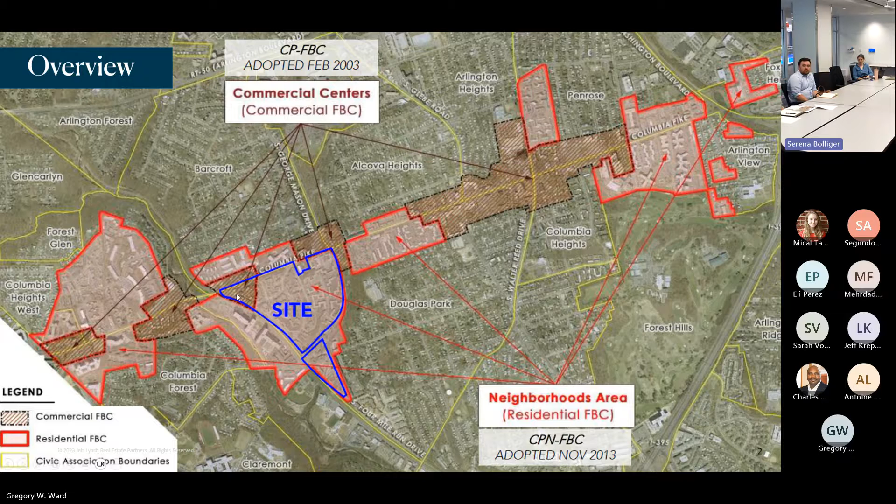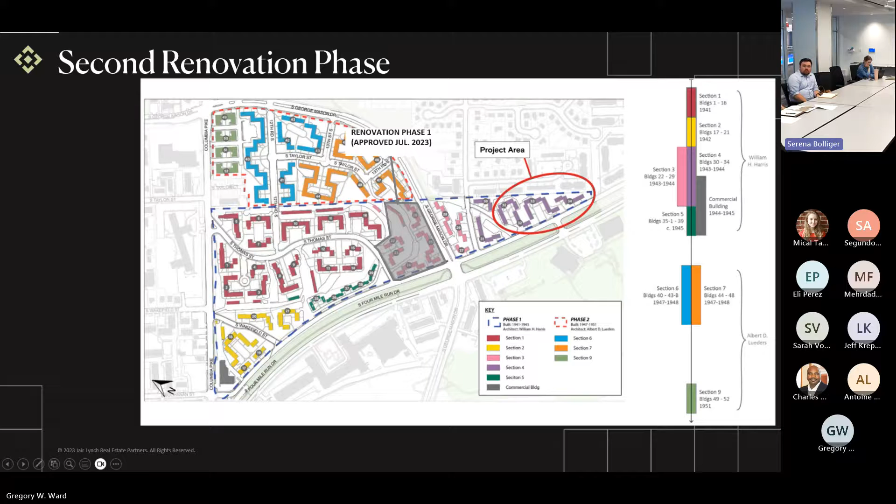Go to the next slide. Here's the aerial image of where this renovation phase is within the whole project. It's that tail end of the form-based code where no redevelopment is anticipated, so this was a great opportunity to go ahead and get started on renovating these units for the existing residents - buildings 32, 33, and 34.

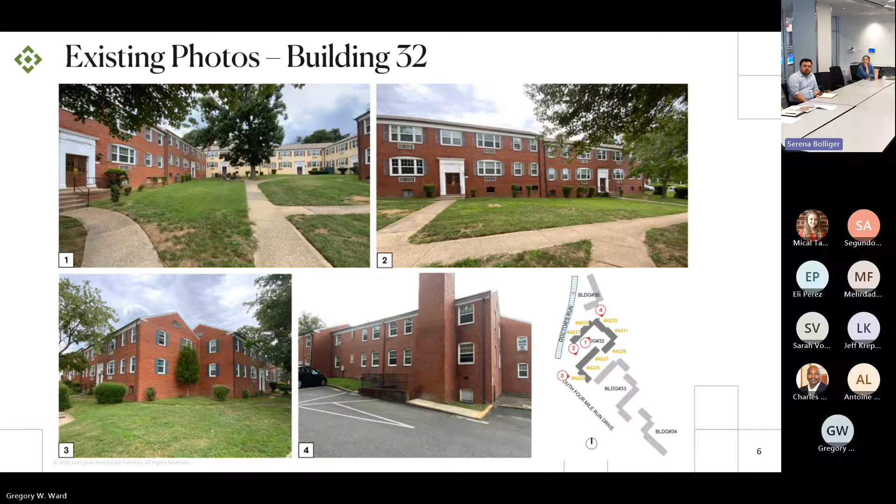Now we'll get into the renovation scope of this project, which is very similar to the project we just went through. I'll note there are no rear additions because of where this is located in a resource protection area floodplain, so there's no opportunity to add additions to the backs of the buildings to make those units bigger. But there was an opportunity to add accessibility because of the way the grade is across building 33. The key differences between phase 1 and phase 2 are no rear additions and adding some accessible entries.

In terms of the exterior renovation, it's very similar: cleaning up the brick, infilling some of those older PTAC heating and air vent systems on the front and filling them with new brick. You'll see some of these buildings where the brick has already been painted - in cases where we're infilling brick, we'll paint it to match the existing painted brick so it blends in.

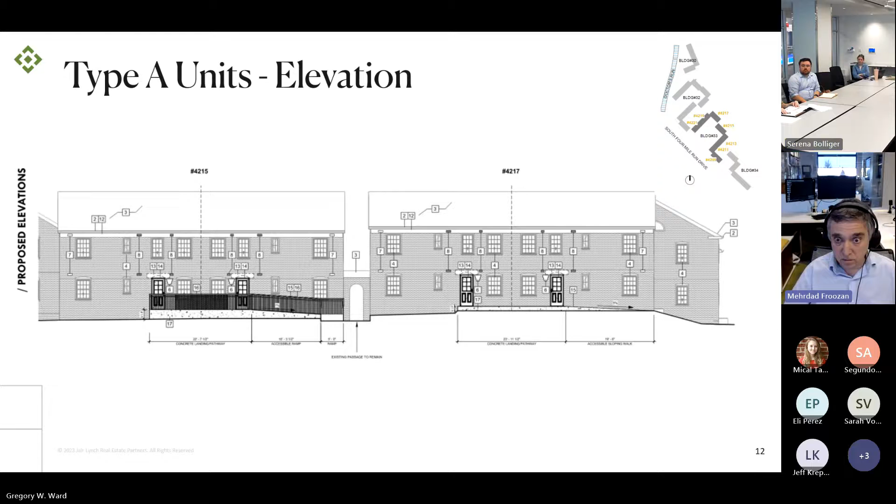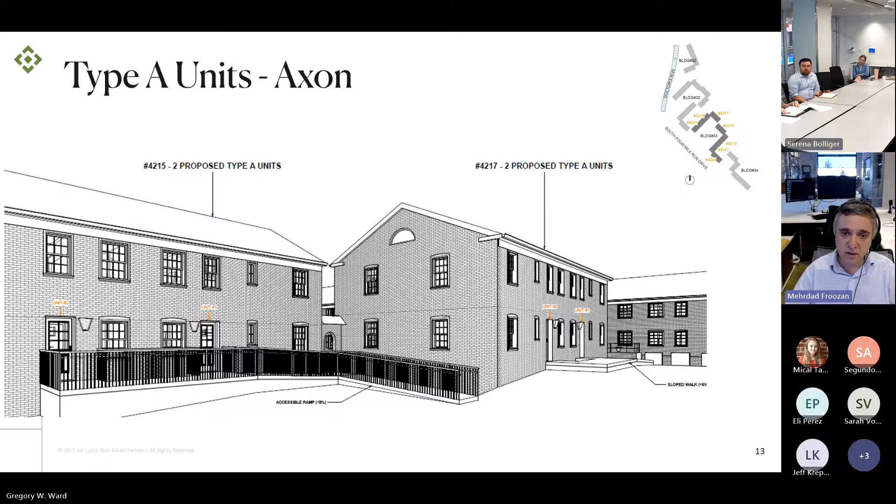Next slide. What we can say on this slide is we're showing the new light fixtures, very similar to the existing for all three buildings in the scope. Building 32 has 14 of these lights, building 33 has 9, and building 34 has 5 of these lights - the same type of exterior lighting. And then also we have the cladding on the left side - we are showing the cladding on the existing trims around the door and elsewhere.

Next slide. Same as phase 1, the 5 buildings 22 to 26, we are replacing the windows with vinyl windows. These are like simulated divided lights, 6 over 6, and then also we are changing the basement windows in kind. So the vinyl windows match the existing style and also the color, but they are much more performant in terms of U value and SHGC.

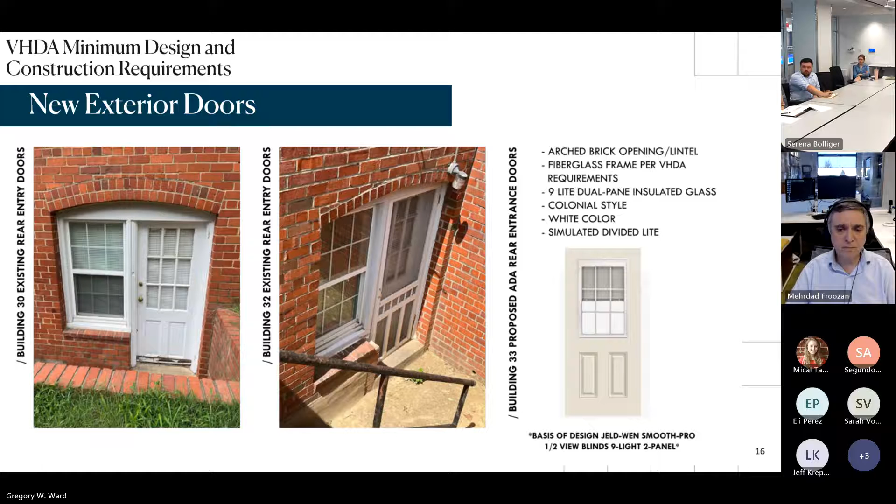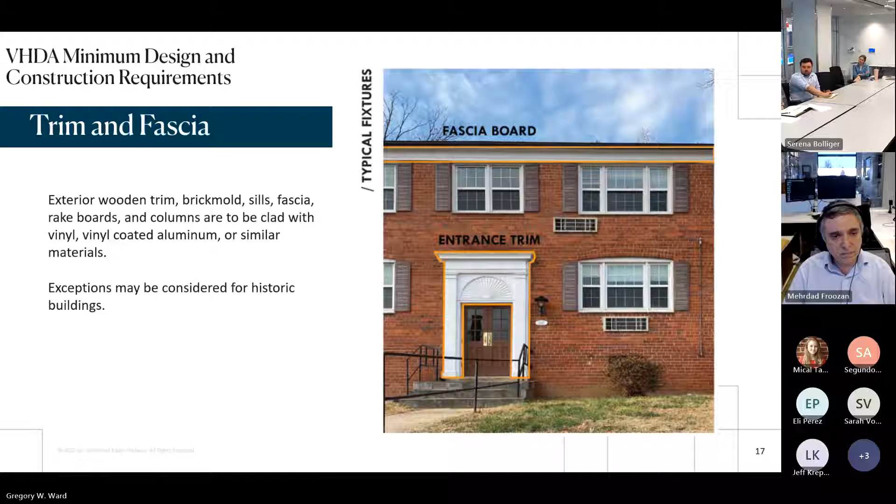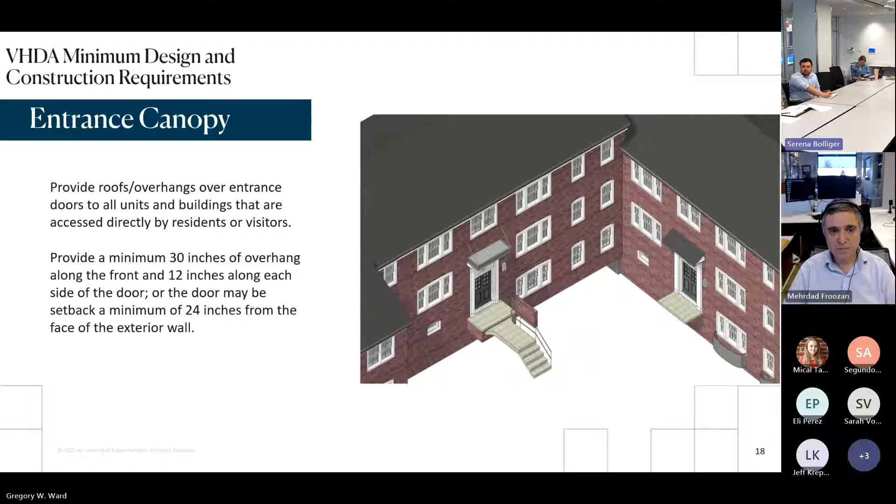This is the modern style, option 1, and this is the second option, option 2, which is more traditional. This is the one we are going to use definitely. The number of canopies is indicated on the left side at the bottom of the page. Building 32 will get 8 canopies, building 33 will get 7 canopies, and the last building 34 will have 4 canopies of this option 2 style.

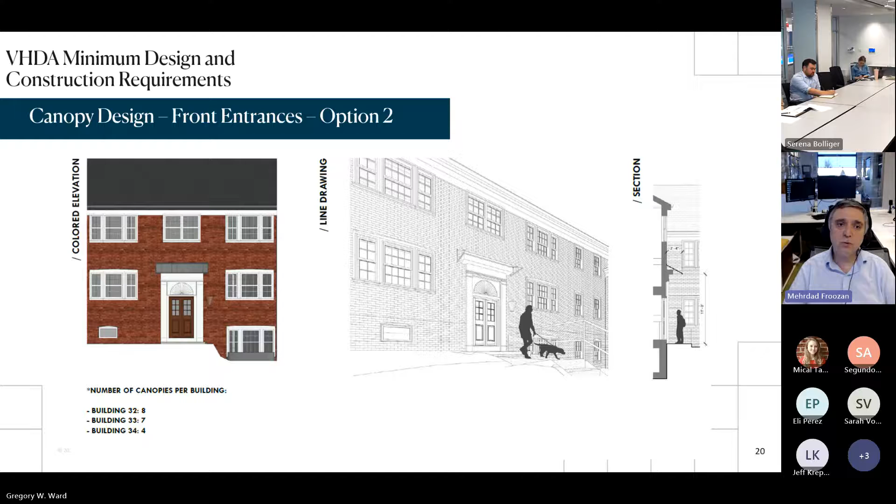For the back side, we also have back entrances that will have canopies. Building 32 will get 6 canopies. Again, the number of canopies is marked here, but with the same style of option 2.

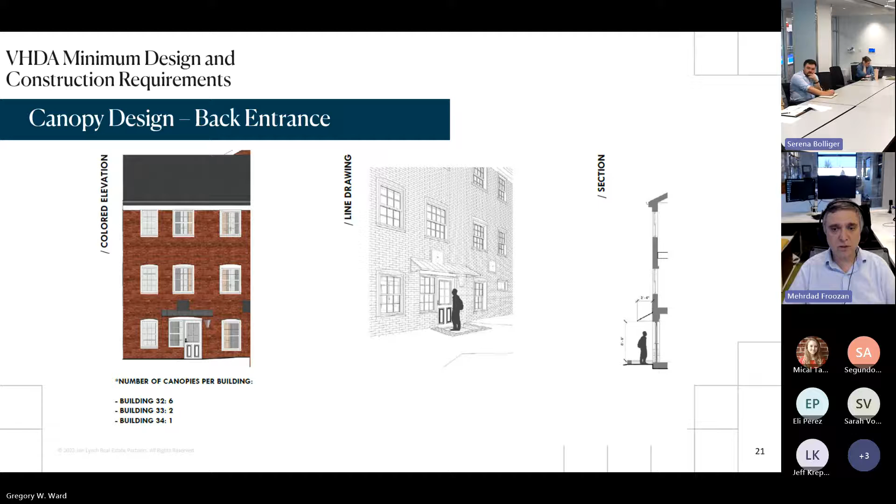Thanks for that. Just to summarize our application materials: we submitted the form-based code use permit last week, and that's now being routed to staff for review. We've got that use permit for our building renovations and site improvements with modifications, similar to last time, requesting a modification for the parking to permit the existing ratio to remain minus those three spaces that were removed to create the ADA accessible spaces. Then we've got 2 tiers of conservation area standard modifications - ones for window replacements to vinyl material, new rear penetrations for ventilation and heating/air systems, and new rear penetrations for the accessible unit entrances and that fiberglass door material. The second set of conservation area standard modifications are ones we'll be requesting waivers for from Virginia Housing, which is the vinyl aluminum cladding, the wood trim, and the canopies.

In terms of timing, this is our first meeting with you all here. We're anticipating going to the HALRB at the next meeting this month on the 20th, and then again going to the HALRB at the October meeting. We're anticipating going to Planning Commission and County Board on this use permit later this year in December. So that concludes our presentation - we're happy to get to discussion and answer some questions.

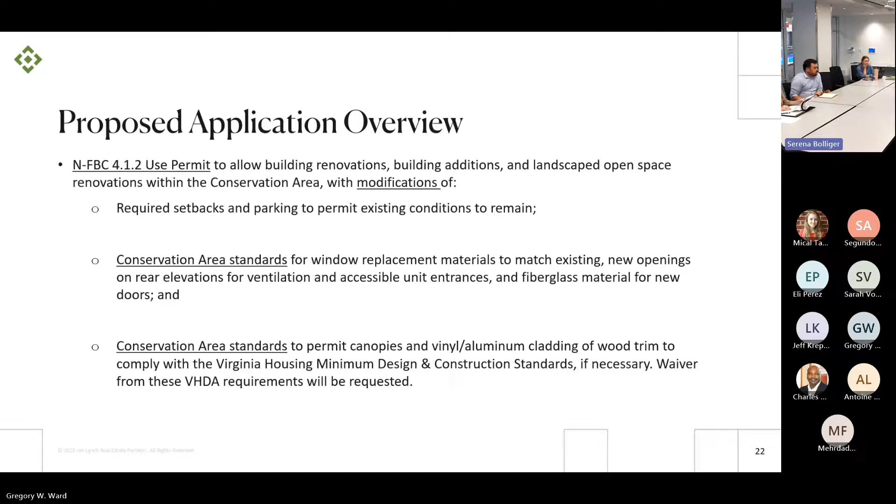Could we go back to the slide with the accessible entrances at the rear? The elevation? Yes. There you go. There you go.

The problem I see is this seems to be grossly overkill in terms of the handrail. You don't have that much of a grade or drop, and I don't think you need a series of vertical pieces there. You could solve that with a couple of light horizontal or near horizontal pieces and have a handrail that doesn't present such a strong handrail in front of it. That handrail could be handled a lot better, I think.

Well, my answer is that at this time we really didn't design the railings, so definitely you're right. We can make this much lighter and better for this purpose. Mehrdad and Jeff, are there any building code or accessible regulations that require a railing every certain distance, or how much room do you have to work around?

Well, normally a sphere of 4 inches should not be able to pass through the pickets. I should say that we still don't have a very precise survey here, and probably the difference of elevation is so small that probably we don't need this much pickets and railings. But Jeff, I think you can better speak about this.

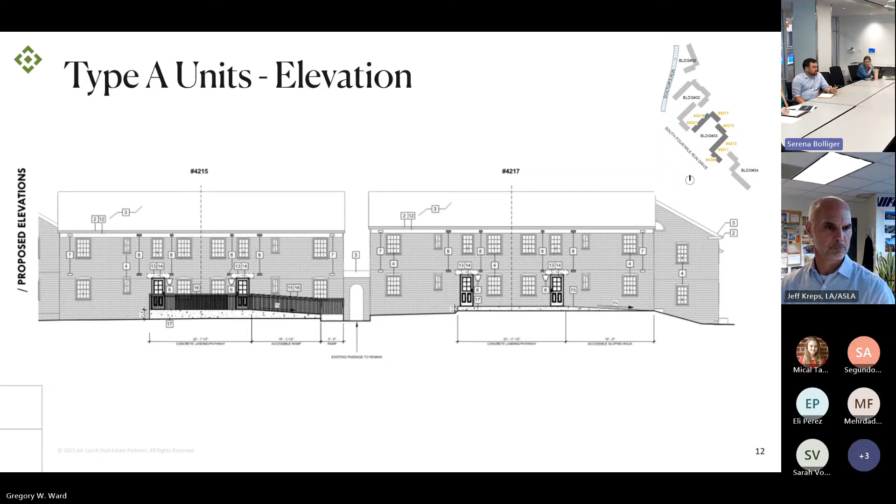Absolutely. Will the light fixtures be the same on the front as on the back as well? That sort of, I guess, will it be different from back to front? Are the light fixtures on the back next to the new entrances, are those new? And then will they match the front?

I assume they will. No, this is just graphically symbolic. It's not exactly what the light fixtures that we showed on the picture will be the light fixtures that we are going to install. Yeah, this is basically coming from the software.

One other question, you did say that the unfortunate air conditioner HVAC units are going to be removed from the front and they will be on the back. All of them? On all rear elevations, we're going to have some new penetrations for the upgraded heating, and you can see the vents through the brick, vents like last time, through the rear.

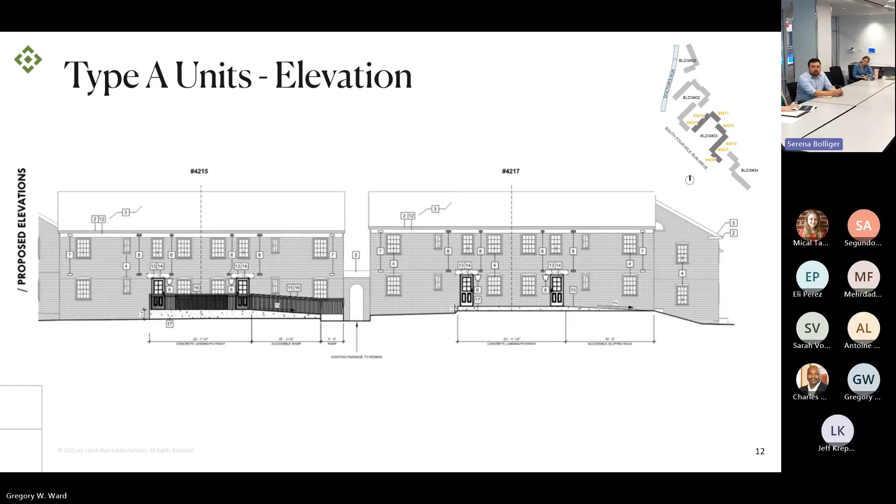So those PTAC units on the front will be removed and you can infill that with brick? So we're infilling all that with brick, just like we did with the first phase. And then, like I mentioned, Greg, if you go back to some of the existing photos, some of these buildings have already been painted that kind of blonde color. So where we have, we'll be removing those vents next to where the numbers 3 and 4 are, and when we infill that with brick, we'll match that brick to the paint on the outside so that it'll fit in seamlessly.

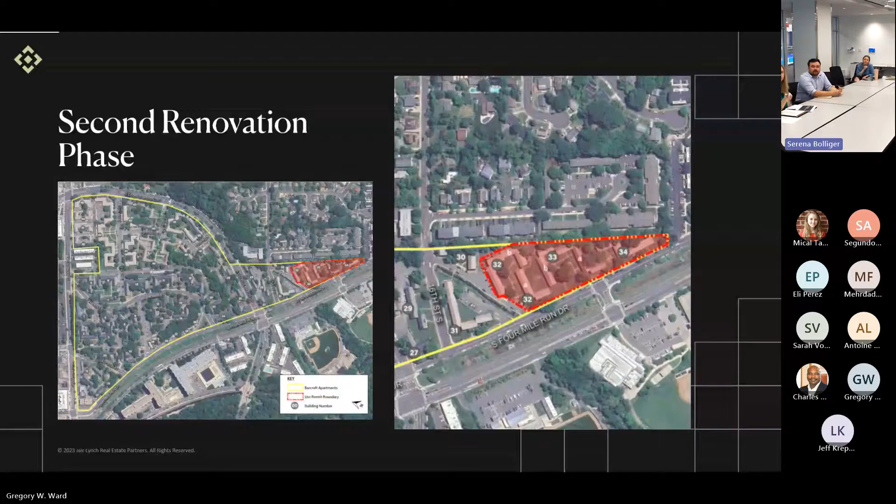I had a question about the passageways—is there only one of those, or are they at every building? There's only one in this section. Although, Sarah, you might know more about whether that archway at building 33 appears elsewhere across the Barcroft site.

Don't we have some small units going outside the building? There are a few, yes, and they've been preliminarily located on the backside so you don't see them from the street—like those little condenser units. Yeah, I think we're showing that in our more detailed use permit plans.

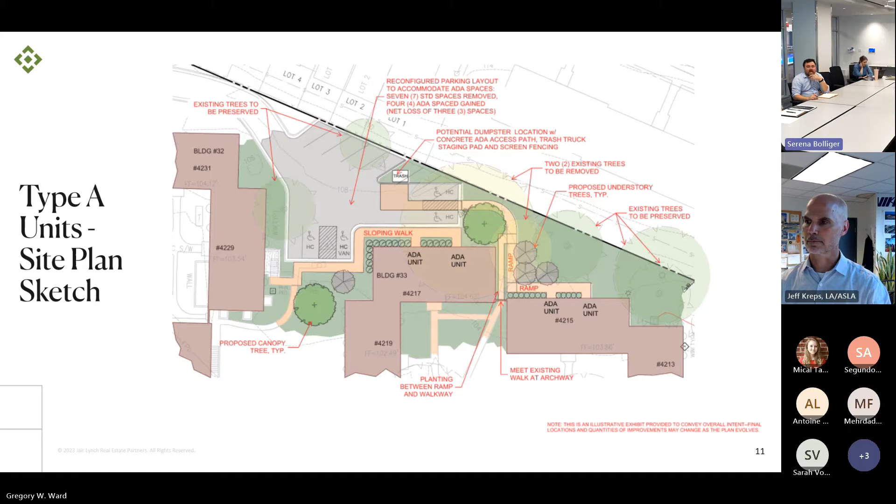I guess the condition at the ADA units now, is it like a stair down or stair up? It's just curiosity, there's nothing. Greg, do we have photos of the back of building 33? No, I think it's just the front. There's no door.

Because if you remember, these buildings kind of enter and split, so you can't get accessibility through the main entrance—you have to punch through the back. The idea is you would park there, then walk back, and you'd be up on a higher level to get in.

Lauren, to follow up on your other question—I think this type of passageway is unique to this section, section 4, but there are other passageways, a little different, in the second phase of the site. The second phase has these big paths because the buildings are so long, they just cut through the building. They're not ornate, just functional cut-throughs—definitely different than this.